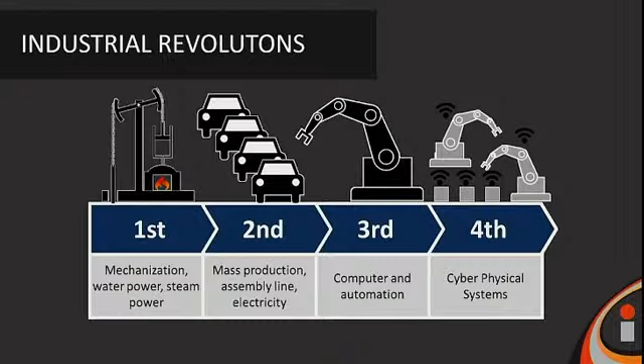The third industrial revolution began in the later 1900s and is categorized by computers and automation. The fourth industrial revolution, or Industry 4.0, was coined in Germany in the 21st century and is categorized by the Internet of Things and cyber physical systems. This is a current and ongoing revolution which is still changing and evolving.

As a basic overview of the Internet of Things, it all starts with the devices or things, which include sensors, actuators, and other devices and the data they collect. The next step is the Internet connection and data transport and access, making this information available to us. This is done through a variety of PLCs, routers, gateways, and much more.

The next part is storing and organizing the data for analytics. This is done on a local or cloud server and is organized for easy access from dashboards, machine learning algorithms, and APIs. Then you get to your final and most important step, the value gained from either the human interaction with dashboards or the results and actions generated from machine learning.

The data stored from IoT devices is often called big data, and depending on the application, it can consist of huge data sets. As mentioned, this data is stored and organized on cloud or local servers using a variety of tools. This data is then used for artificial intelligence and machine learning, which is a form of advanced analytics that learns about data and looks for patterns, trends, and insights.

As mentioned before, the Industrial Internet of Things is not a destination. It's a tool to provide value, and it must provide value and have meaningful uses.

Here are some of the benefits or advantages of Industry 4.0: improving operational efficiency and productivity as the highest priority advantages, proving and opening up new business opportunities, reducing downtime, utilizing assets more efficiently, and being able to sell products as a service instead of a one-time cost. Also reducing the cost of assets, enhancing safety for workers, innovating current processes rapidly, and better understanding customers.

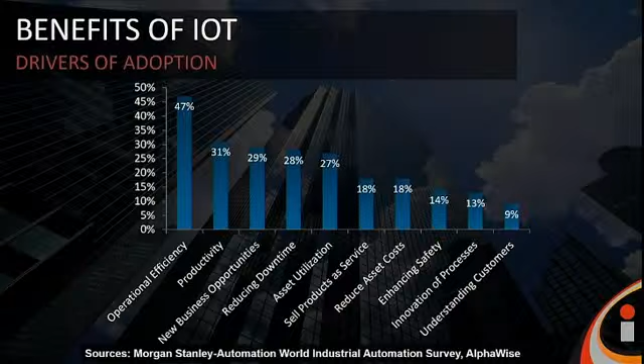This is a real-world existing example to show the impact of IoT and machine learning. This features a technology company that happens to make steel, Big River Steel, a company from Arkansas, USA.

Big River Steel uses IoT and machine learning for many uses, including demand prediction. Big River accurately predicts demand for steel using machine learning models, using macroeconomic data, historical demand for steel, manufacturing activity, and the activity of large consumers of steel.

Sourcing and inventory management: Big River predicts the availability of scrap and hedges for future events.

Scheduling optimization: the optimization models maximize energy consumption at off-peak times and thus minimize energy costs, as well as production optimization.

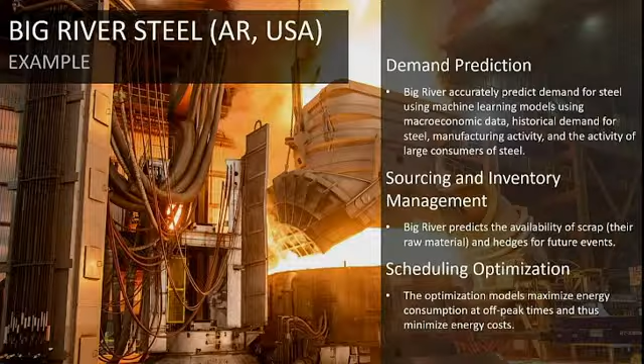Big River uses machine learning models that can predict when events like breakouts and cobbles are most likely to happen and minimize their occurrence. Predictive maintenance is also used.

Big River uses machine learning models to identify the optimal times to maintain key equipment, and for transportation optimization, Big River works with customers and shippers to minimize the costs of outbound transportation.

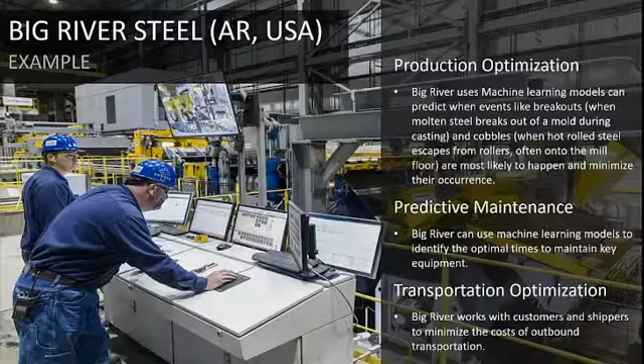At Inductotherm, we're focusing on the same uses of machine learning that pertain to the melting and heating portion of the foundry operation. This includes data access analytics, helping managers to visualize and efficiently make sense of what is going on in real time, and process optimization.

Melting processes can be optimized to increase efficiency and reduce costs. Predictive maintenance means equipment problems can be predicted using analytics before they occur. And with training, foundry workers can be brought up to speed faster.

This is an example of Inductotherm's MiPlant IoT dashboard, which shows data collection from equipment and IoT devices. It shows a mix of equipment metrics, charts, and analytics to help managers efficiently track the performance and maintenance of their equipment.

As mentioned, we're going to focus on process optimization and predictive maintenance, and displaying alerts from these analytics.

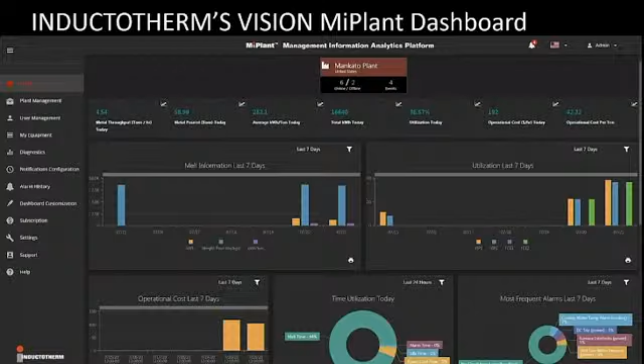We are focusing on areas to be able to provide value and cost savings, like saving on energy costs. This gives process recommendations, such as closing the hood during certain periods.

Items like reducing downtime through predictive maintenance, water drain and inlet analytics, and more. Also labor training and time utilization: train your labor force faster and give them the tools to utilize time efficiently.

Increase production rate by optimizing power utilization, broadcasting time lost due to limitations in the plant. And increase product quality and consistency by recording all melt data and sensor information for quality management.

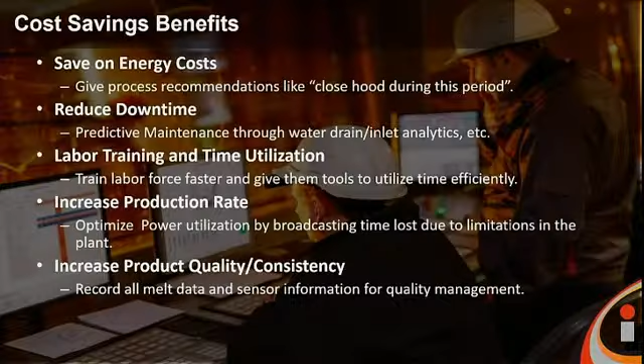There may be challenges to implementing IoT and machine learning in foundries, but the benefits outweigh the challenges. We must be flexible and adapt to new technologies to keep our competitive edge. Thank you, everybody, I appreciate your time.

This was a great eye-opener presentation by Inductotherm US, and we virtually thank Mr. Huster for his time and effort in making this presentation. A lot of takeaways from this, the big data part on foundries is the most essential thing.

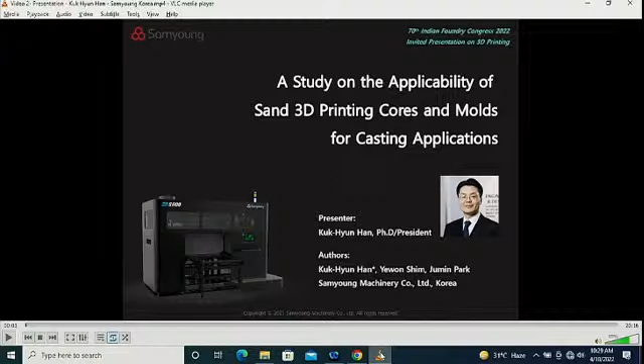So big data, real-time data collection, and machine learning is going to be the way forward, and Inductotherm has taken a great step forward in helping the foundry community in general. Thank you, Inductotherm. So next speaker, the next video is by Mr.

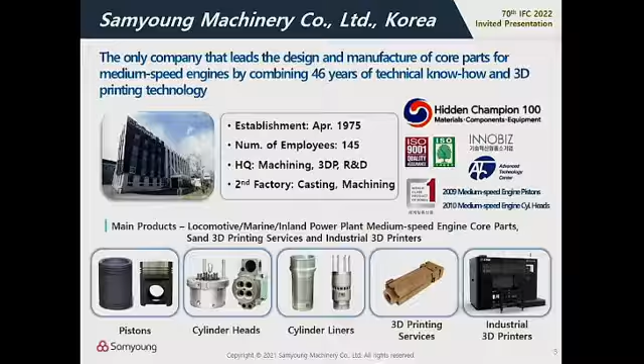That number is not that big, but we need to see that the compound annual growth rate of this market is very high. From 2010 to 2020, the 10-year CAGR is about 25.4%, so this number is big. Based on this CAGR, we can calculate the expected market size in 2030, which will be about 123 billion US dollars. That market is very huge.

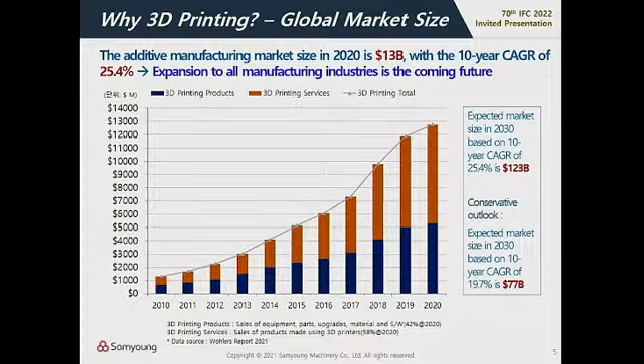That means additive manufacturing's expansion to all manufacturing industries is the coming future. As you know, lots of innovation through 3D printing technology in various industries has happened a lot recently.

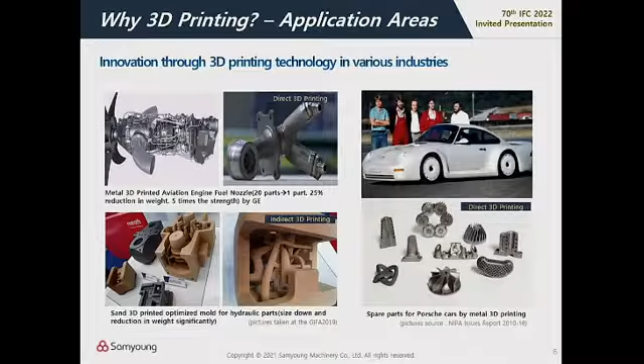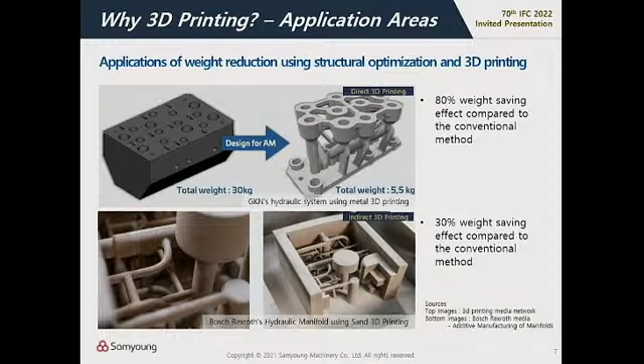Next is pain points and solutions in the foundry industry. The reality of the foundry industry is tough. There are lots of difficulties in the current foundry industry, and these are the 4 major challenges.

The second column is about solutions for the pain points, and the third column is about core technologies to address the solutions in the second column. I can say that 3D printing is a key technology to overcome the difficulties of the foundry industry.

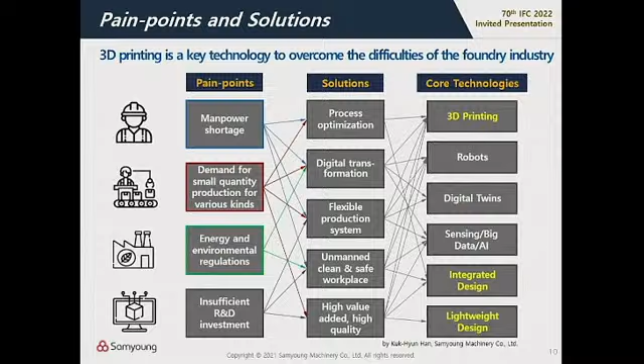Next is an introduction to sand 3D printing technology. Sand 3D printing is a manufacturing technology to create three-dimensional objects by repeating the process of laminating sand layer by layer and selectively jetting binders on shape areas.

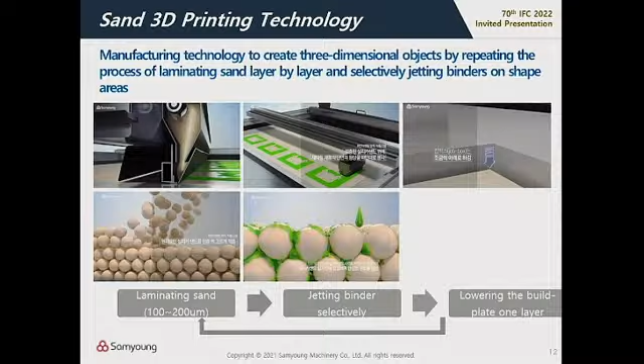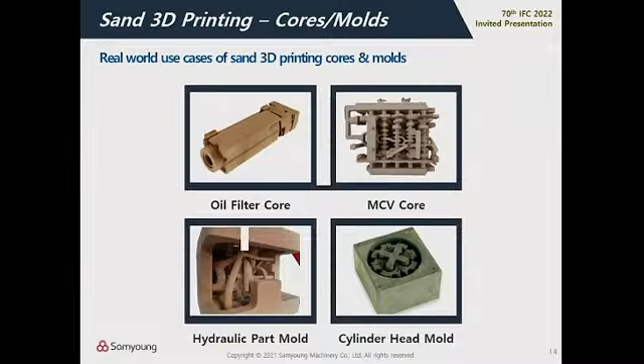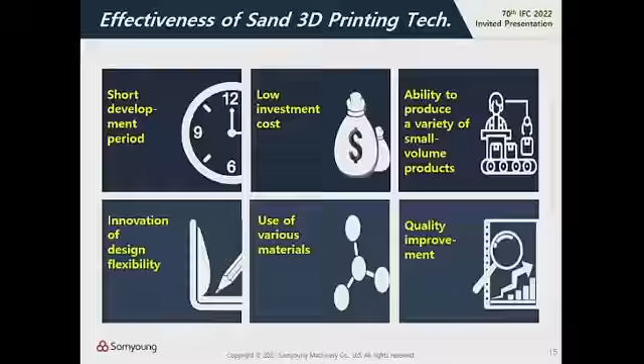I explained the effectiveness of sand 3D printing already, but many people assume that the mechanical properties of sand 3D printed cores and molds are not enough to support metal casting. But that's not correct. I will show you the results of our experiments for that.

So the result was much higher than that.

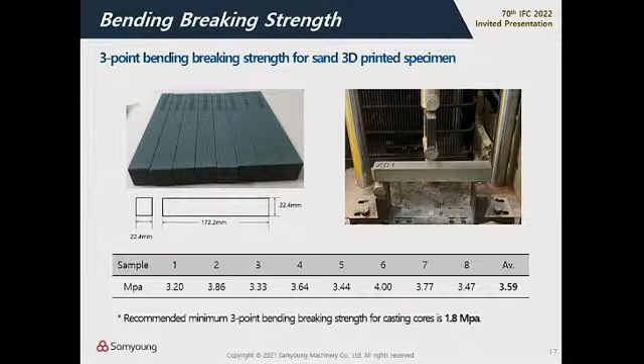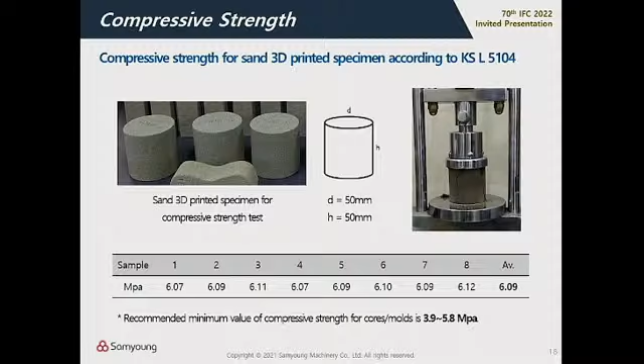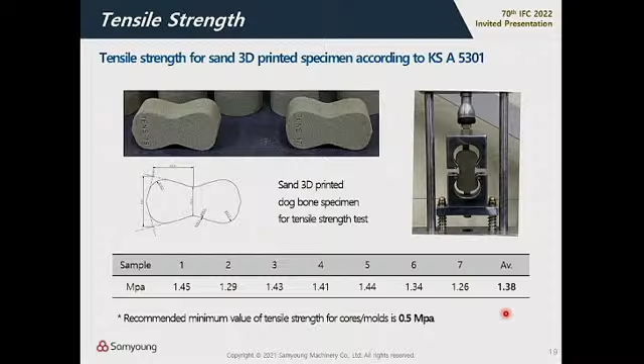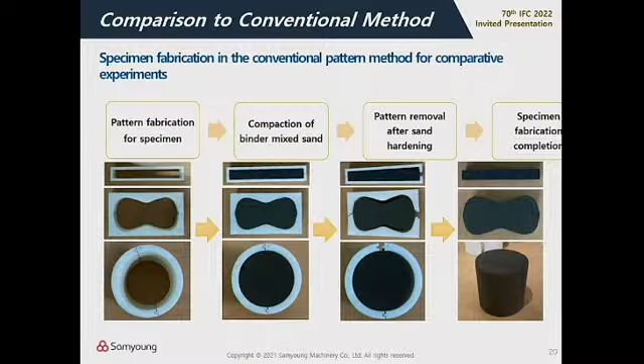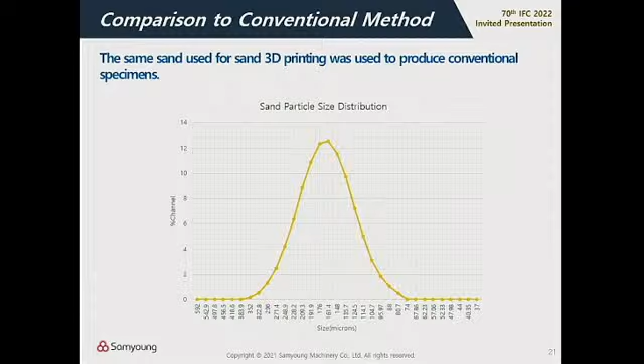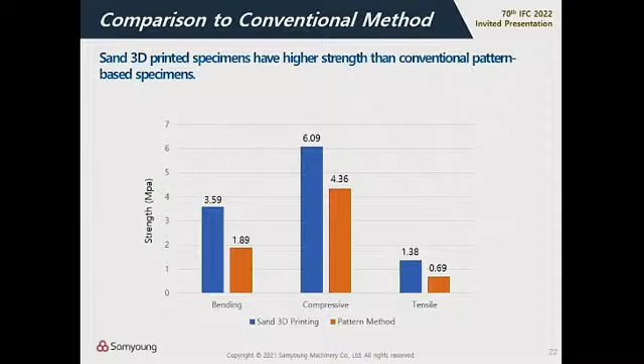The next topic is the air permeability of sand 3D printing cores and molds. This is a topic that many people are most concerned about, because sand 3D printing uses very fine sand. Many people think that the air permeability of sand 3D printed cores and molds is very bad, but that's not true. So let's see how.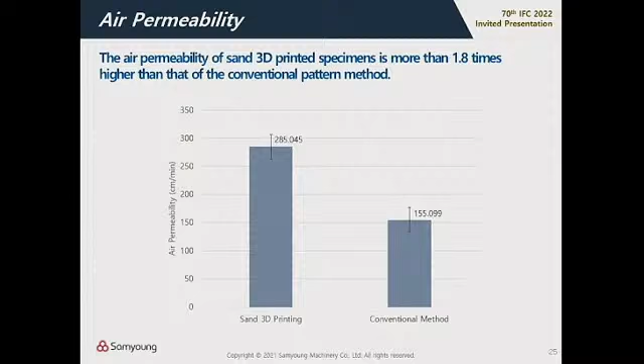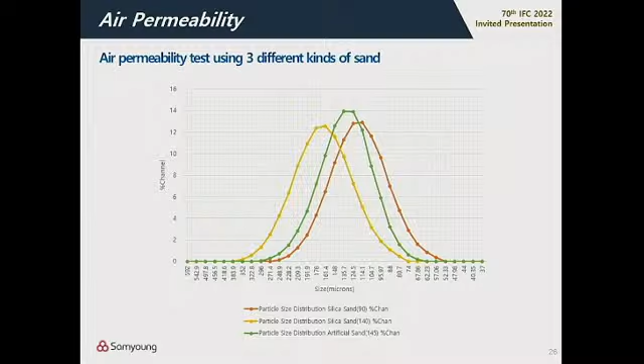In addition, we did an additional air permeability test using 3 different kinds of sand. This is the particle size distribution differences for the 3 kinds of sand. This color is the particle size distribution for silica sand 140, this is for artificial sand 145, and this color is for silica sand 90. The number means the diameter of the sand.

These are the pictures of the microstructure for the 3 different kinds of sand. As you can see, the sphericity of the natural sand - these 2 are natural sand - looks not that good, but that of the artificial sand looks good.

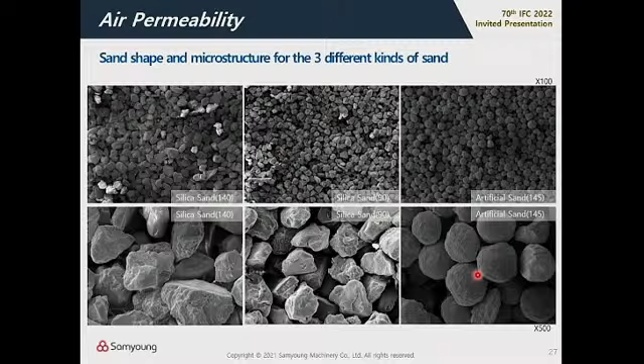This is the test results. This is the result for silica sand 140, this is for silica sand 90, and this is the result for artificial sand 145. It shows that the larger the size and the higher the sphericity, the better the air permeability.

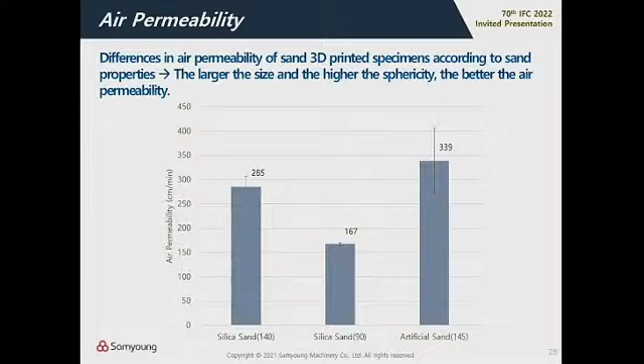Conclusions. Additive manufacturing is rapidly expanding into all manufacturing industries, and sand 3D printing is positioned as a key technology to overcome the challenges of the foundry industry. The core or mold made by 3D printing satisfies all the conditions sufficient to produce products through metal casting. The mechanical properties of the core or mold fabricated by sand 3D printing are much superior to those of the conventional pattern method, and the air permeability of the core or mold fabricated by sand 3D printing is much higher than that of the conventional method.

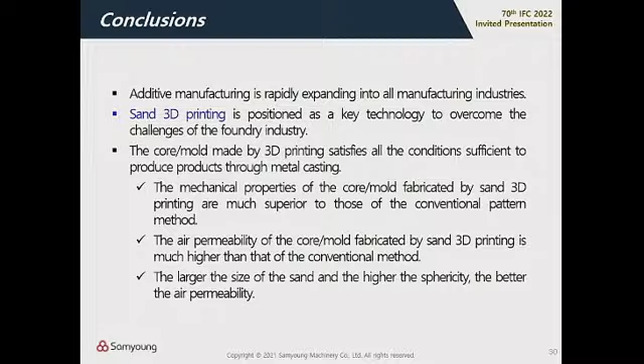The last thing is about materials. We did lots of projects using sand 3D printing for various kinds of metals. These pictures show our successful outcomes, such as gearbox parts, pump box parts, pump impellers, military car parts, power plant impellers, and agricultural machine parts. These prove that cores and molds made by sand 3D printing are suitable for casting all metals, including aluminum, cast iron, cast steel, copper alloy, and so forth.

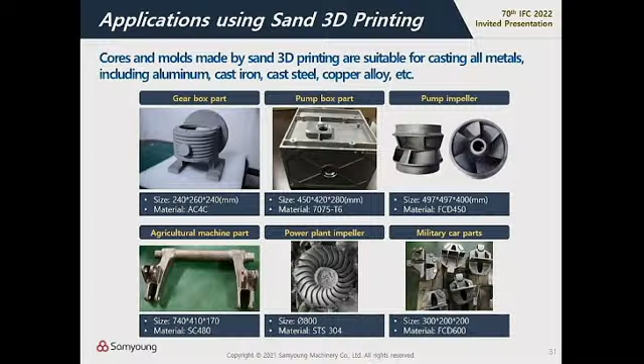So I can say that sand 3D printing is becoming the next generation technology for innovating the foundry industry. And as you know, the 74th World Foundry Congress will be held in Korea during October 16th to 20th. Please join the Congress and let's meet there.

Okay, this is all of my presentation. Thank you very much.